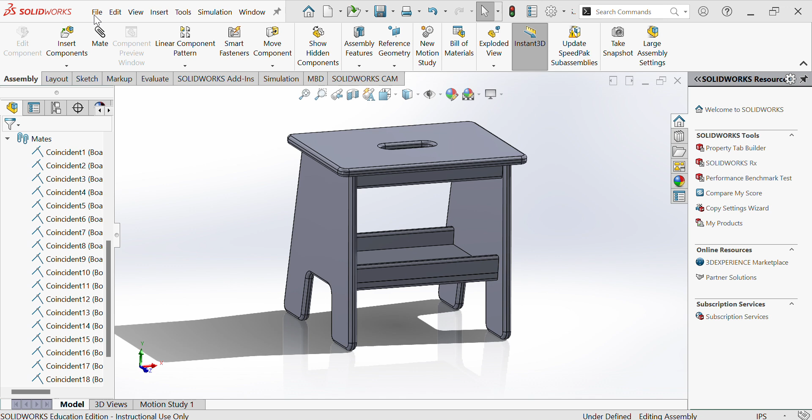Now that we've finished assembling the step stool, we need to put it on drafting paper and dimension it. Before doing that, you must save this file. It will not let you put it on a drawing sheet unless you save it. After you have it saved, you'll hit File, Make Drawing from Assembly.

I have a template created for our class, so we'll hit Browse, and you'll navigate to your folder. Once you have that done and selected, there's my template, you'll select OK.

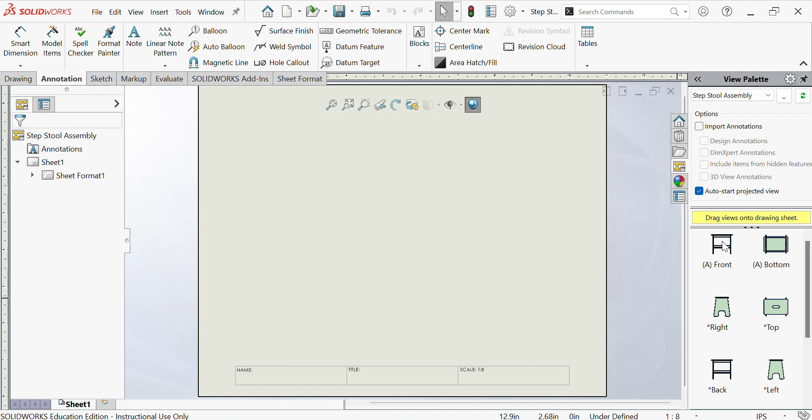The first thing that we always do is select our front view and put it in the bottom left of our paper. I'll release. I did that by left-clicking the view, holding and dragging it over. I release once I got it to where I wanted. Once you release that front view, then you're able to put your top view by just raising your mouse straight above it and clicking once.

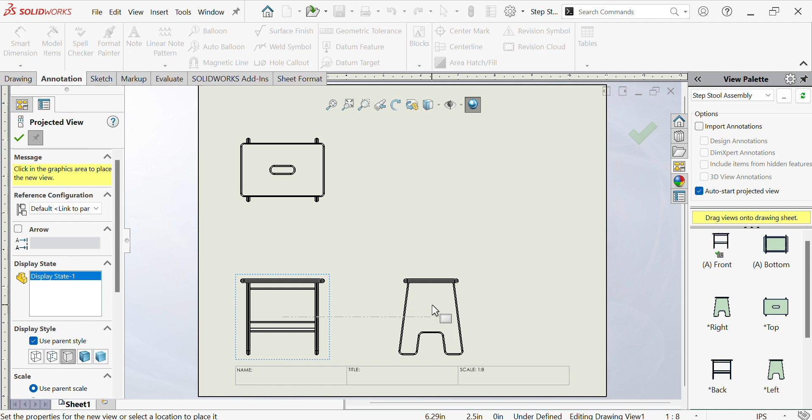Then I'll come back and go to the side. I'm setting where my right view would be. I'll click to set it. Then I'll come back and go at a 45 degree to get my isometric drawing. I will click to set it. Once I'm done putting my views, I'll hit Escape on my keyboard.

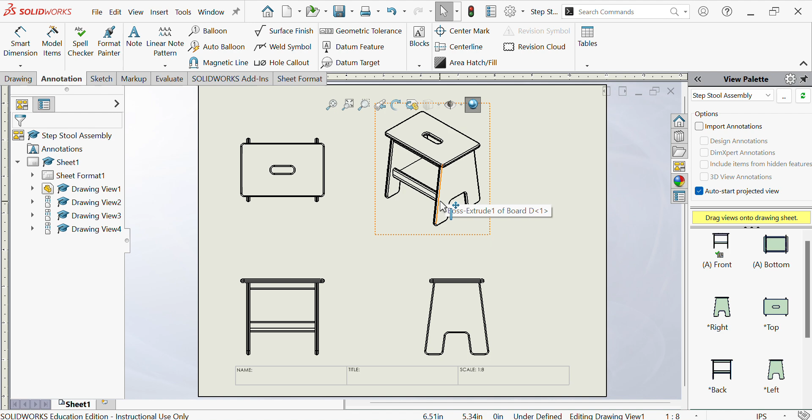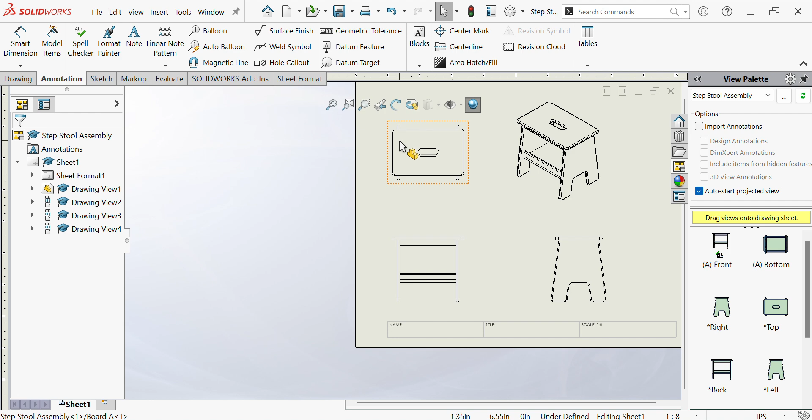If you need to change any locations of your drawings, you're able to move your mouse inward, and once you get one of these dots where two lines intersect, you're able to click and then you're able to move. One thing to notice, if I move my front view up or down or left and right, my other views will follow. On the isometric, if you need to move it, you can move that freely to where you want it. So if you need to give some more space, that's how you do it.

Now on my top view, I want to select it, hit View, Display, Hidden Lines Visible. I'll do that same thing for my right side view. That way you can see where the shelf and our support pieces are.

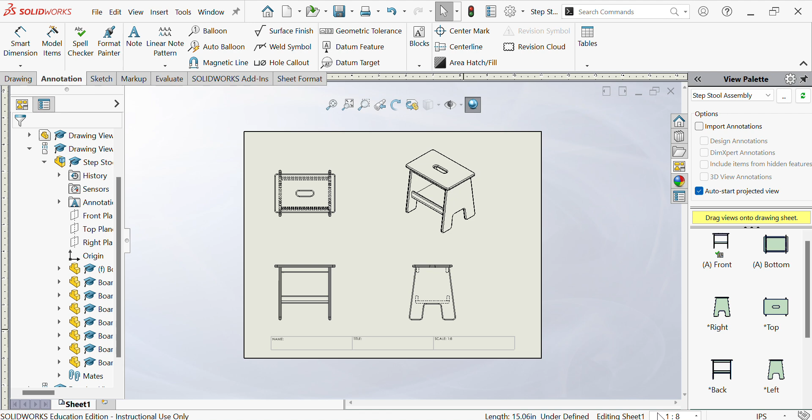Once I have that selected, I'll hit Escape, and I want to make sure I have my scale set at 1 inch equals 8. So right down here, I'll hit the down arrow, and I want to make sure I have 1:8 selected. If you have the wrong one selected, either it'll be too small or too big. So we want 1:8.

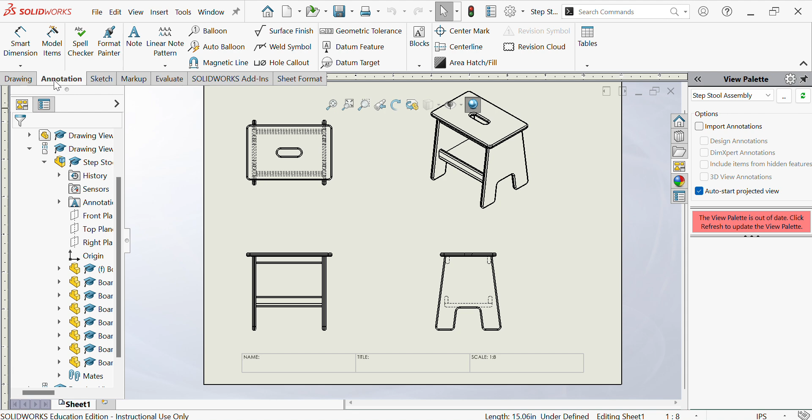Now that you have that, we're going to dimension this. So the first thing we always do is put our overall dimensions for height, width, and depth. You'll do that by going to Annotation and Smart Dimension. I'll start with my height. Make sure when you're doing this, you have filleted edges. Make sure you're selecting the flat area.

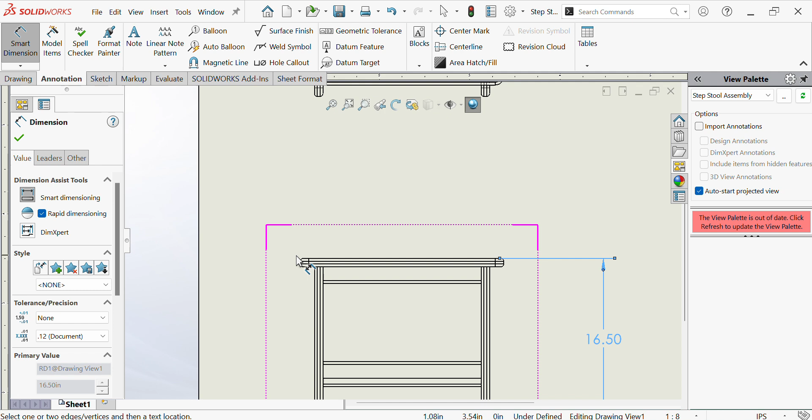I'll put my overall height, and I'll put my overall width. Notice I'm not getting that filleted rounded edge. And I'm putting my dimensions in between my views that correlate. Now I'll put my overall depth, I'll put it on this top one here. When you're putting that up on there, you want it to kind of line up with your other views as far as location goes. So I have my overall height, width, and depth.

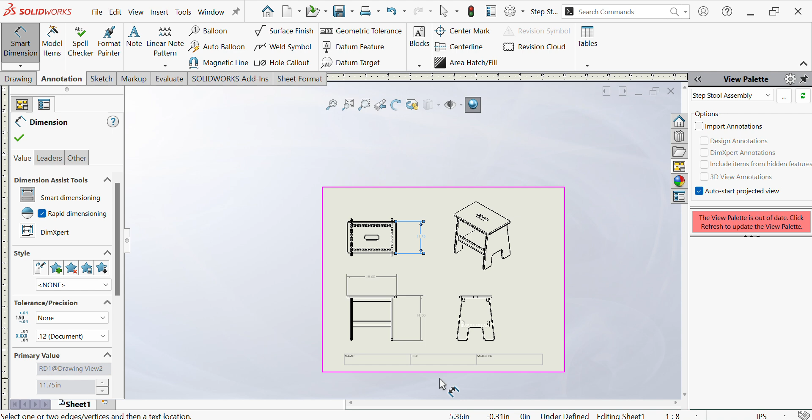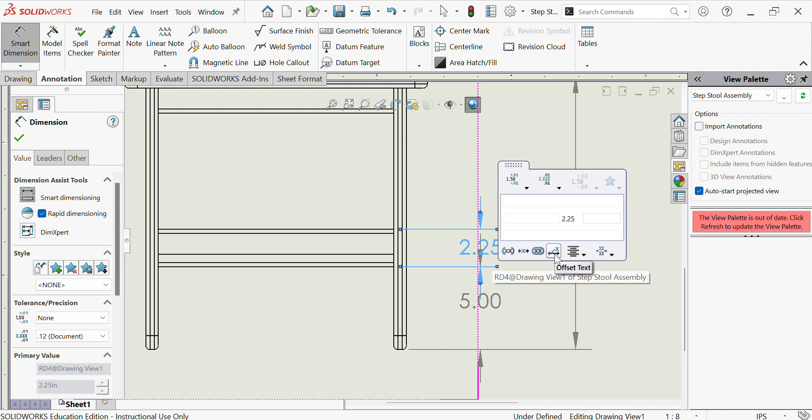Now I'm going to do a breakdown of each of those. I'll start with my height, and I'll say this bottom shelf to the base, 5 inches. I'm putting that on the inside of my overall dimension. Next, I will do the whole shelf. If you look there, that measurement's kind of jumbled in there. If I go over to the side here and hit Offset Text, it will allow me to have a better view of what that number is.

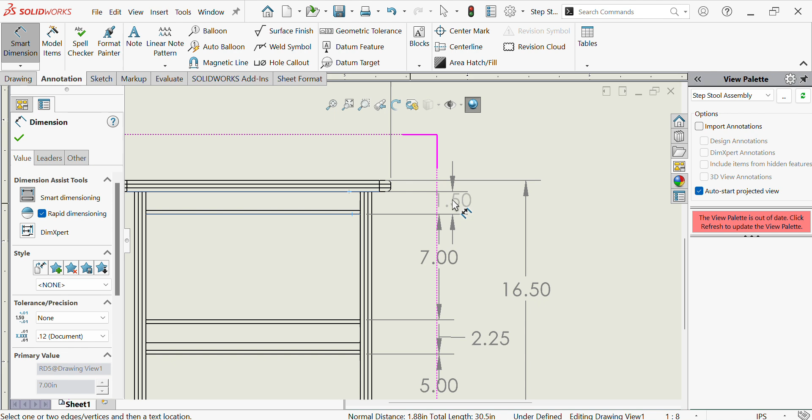Next, I'll get the gap here. Should be 7 inches. Notice I'm lining these up as well as I can, as long as I'm able to see them. My last one is my support piece here. It's looking pretty good. So I have a breakdown of my heights.

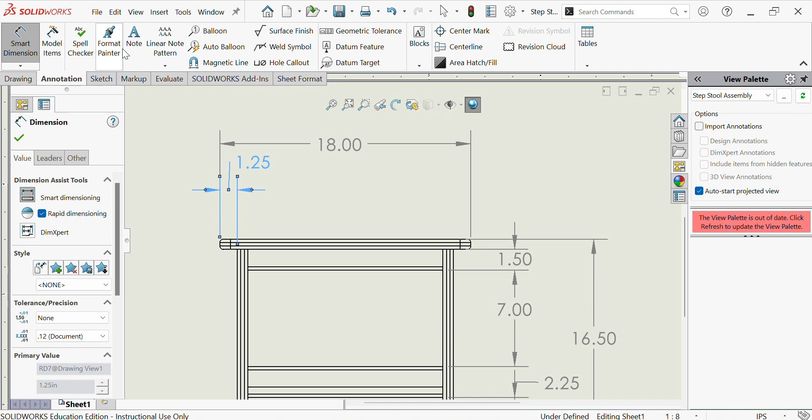Now I'm going to do the same thing for my widths. So we did an offset when assembling from there to there. Same thing, it's tough to read. So I'll hit this tool here, offset text, and move it to where it's legible. Then I'm only going to do one more, and I'll say from here to here is 15.5 inches. So that's looking pretty good. So I'm done with my overall height and width.

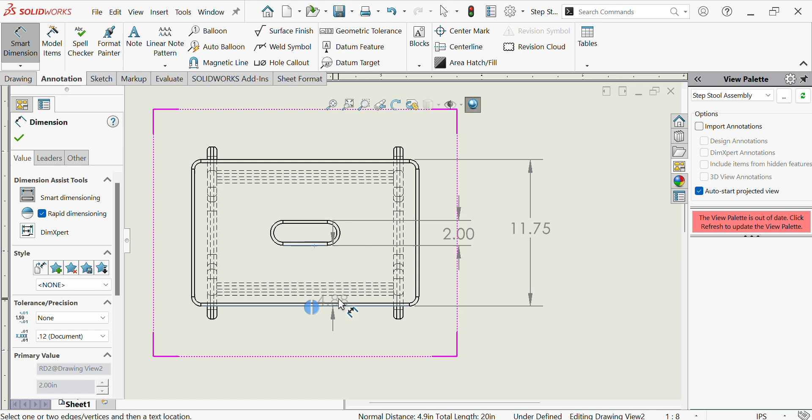Now I'm going to depth. There's not as much stuff to do here. We could do some to hidden lines. It's usually not good practice to do hidden lines. So what I'm going to ask you to do is for the handle, we're going to do the depth of that, and how far away it is from the edge. At this point, all your dimensioning is done. You have the overalls and breakdowns.

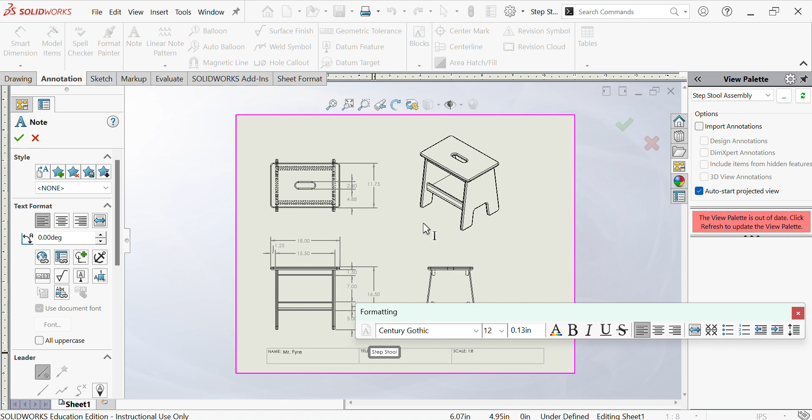Now I want you to go in, click Note, and you'll go down to your name, type your name, and put a title. Your title should be Step Stool. So I'm done with my notes. Notice I have my name, title, and the scale also populates right there.

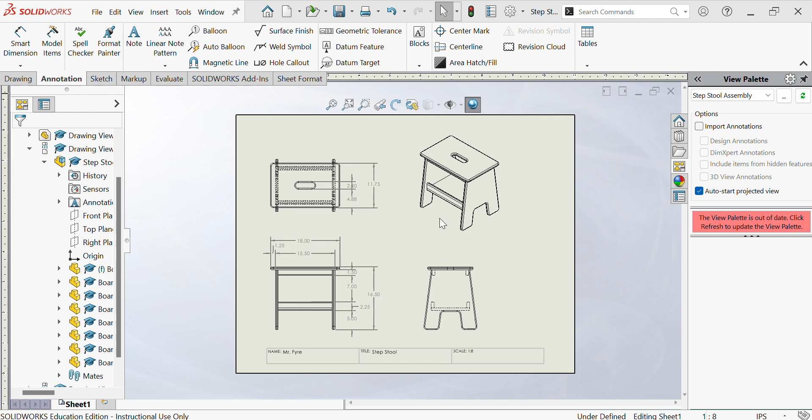Now that you're done with this, you're going to save it twice. The first one, you're going to do File, Save As, and you're going to save it as Step Stool Drawing. And make sure your Save As type is SolidWorks Drawing. That way, if you ever lose your drawing, you don't have to redo anything.

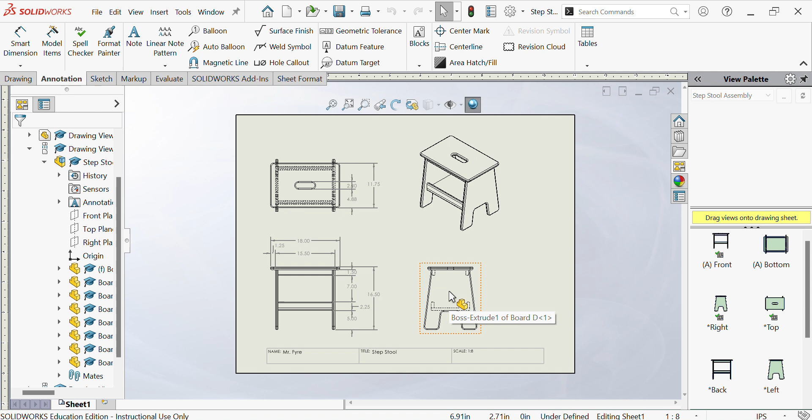Now you're going to save again and do a File, Save As. This time, you're going to keep the same file name, but you're going to change the Save As Type, and we're going to select PDF, Adobe Portable Document Format, and select Save. That last one, that PDF, is the one you're going to turn into Schoology. You are now complete with the whole project.